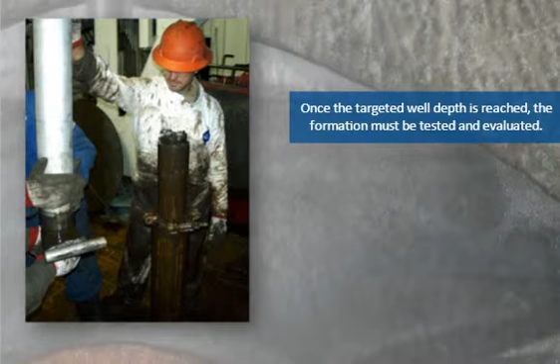Once the targeted well depth is reached, the formation must be tested and evaluated. Core samples may be taken and analyzed to determine whether the well will be completed for production or plugged and abandoned. To determine the potential of a producing formation, the operator may order a drill stem test, or DST.

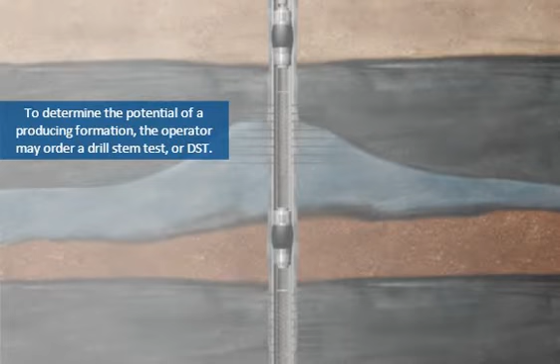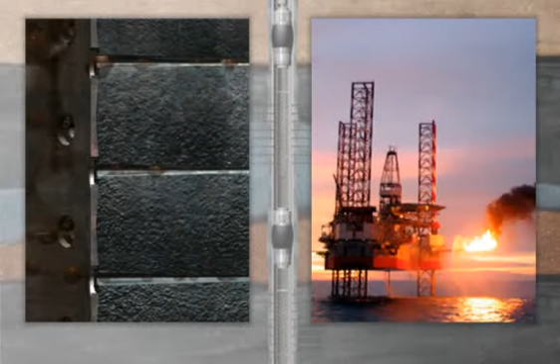The well is perforated and then flowed through a temporary test drill string and flared at various pressures and flow rates, which involves burning off small amounts of the hydrocarbons produced by the well. In some instances, this can also be done without the production casing being run.

In the case of a production well, where the 7-inch liner is already in place, the well will be completed by inserting a string of production tubing, which is similar to casing but smaller in diameter. Production tubing is anchored and sealed in the production casing just a short distance above the liner hanger.

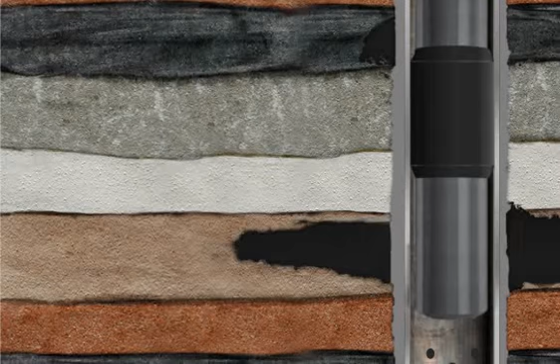The packer is a special tool that is designed to grip and seal off the annulus outside the production tubing and is set in place by applying pressure or by a sequence of tubing movements. Other components are inserted in the production tubing at strategic points. These will be chosen depending on anticipated well production characteristics.

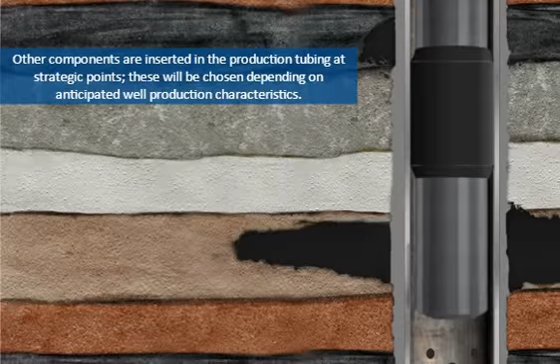Closer to the surface, a subsurface safety valve will be included in the string. This is a valve that can be used to shut the well in from the surface. It is normally held open by pressure, and loss of pressure will automatically close the valve and shut the well in.

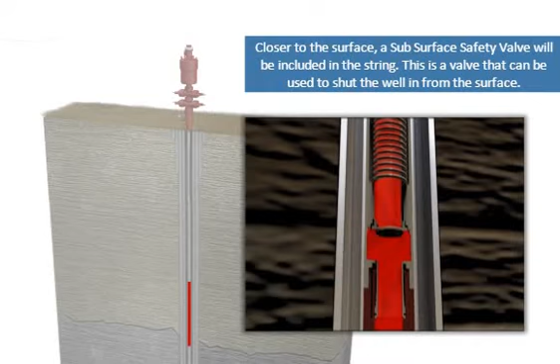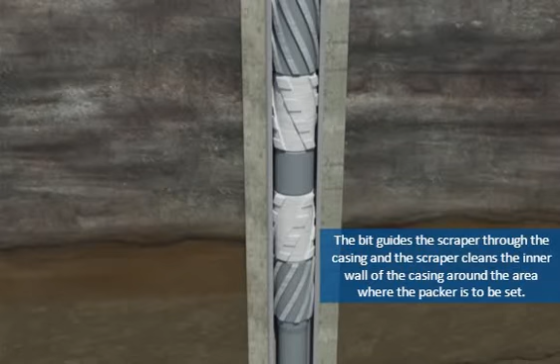Before the packer is run, a bit and scraper run is carried out. The bit guides the scraper through the casing, and the scraper cleans the inner wall of the casing around the area where the packer is to be set. This helps to make a good seal.

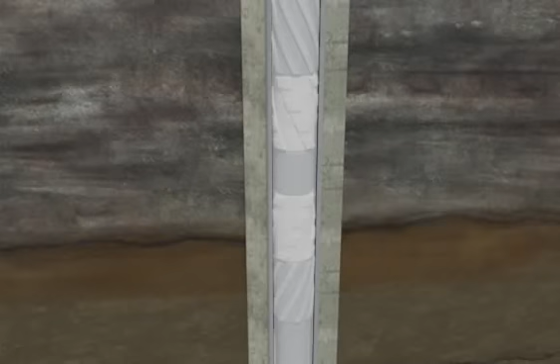The drilling fluid is displaced with filtered completion fluid, which is a brine-based fluid with additives that inhibit corrosion. The completion fluid must provide sufficient hydrostatic pressure to kill the well in the event of the hardware in the well failing, and it must be compatible with the formation that it will come into contact with.

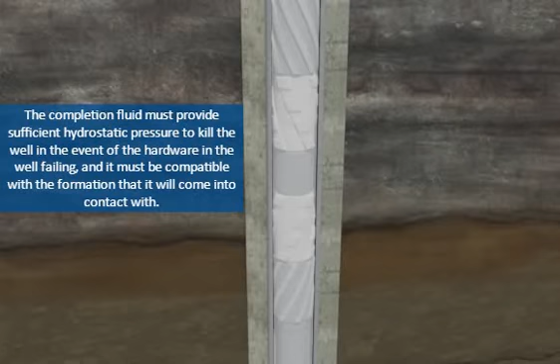Once the correct amount of production tubing has been placed in the well, the Christmas tree is finally installed. A Christmas tree is essentially an assembly of valves which sits on top of the well, and it connects directly onto the casing and tubing hangers which hold the top of the various strings in place. It is designed to ensure that it can withstand any amount of pressure and flow that the reservoir can deliver.

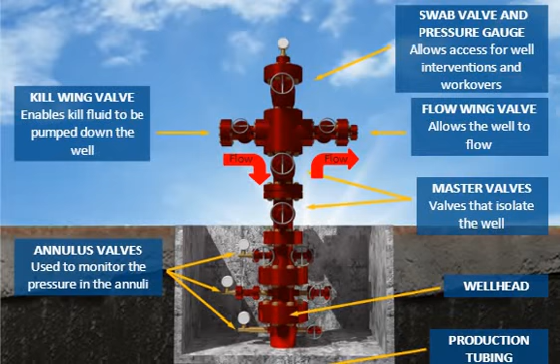The valves on the Christmas tree provide a path to allow the well to flow to production and process equipment. They also provide access to the wellbore for workover and well interventions to be able to take place. A further connection and valve on the side of the Christmas tree give access to the tubing in the event the well needs to be killed. This would be done by the pumping of suitably weighted fluid into the wellbore.

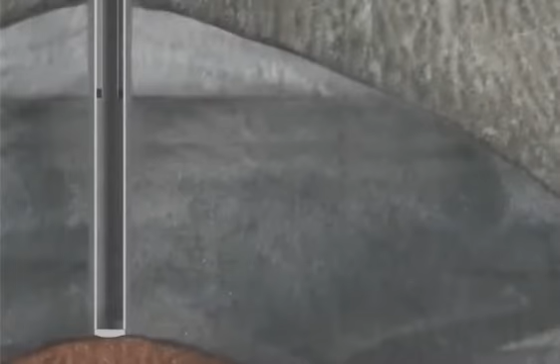The well is now ready to be brought into operation. To do this, the production casing must be perforated. Shaped explosive charges are sent down the well and placed across the reservoir.

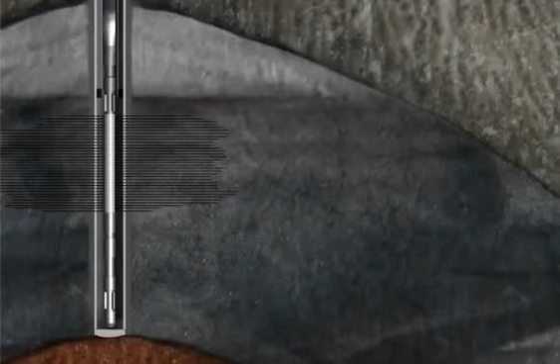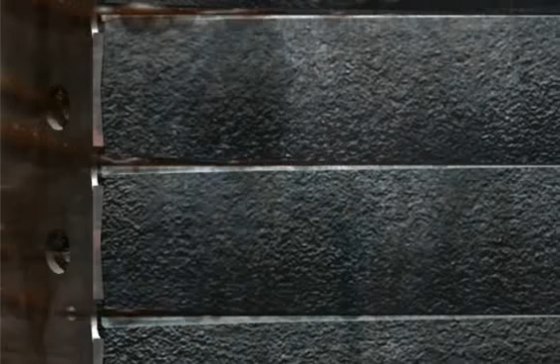The perforating guns can be carried into the well either by wire line, or they can be attached to the bottom of the drill pipe or tubing as it is deployed. When they are in place, the charges are detonated. The force of the explosion punches holes through the casing, through the cement, and out into the reservoir rock.